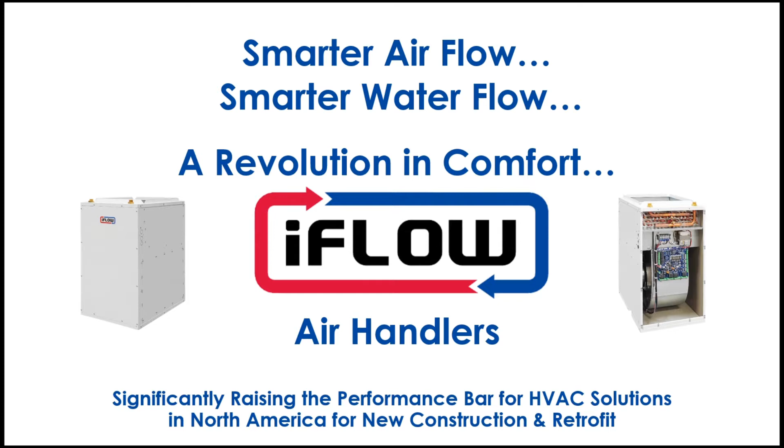In this segment, I'd like to introduce the air handler components and many of the features and benefits. By combining our team's collective engineering, hydronic, and HVAC experiences, iFLOW has created solutions for many of the HVAC industry's most pressing challenges.

The iFLOW air handler represents a technology disruption in that for the first time, our combi systems have been tested and proven to outperform even the best furnaces on the market, making HVAC solutions for homeowners smarter, quieter, more comfortable, and much more efficient, while for the contractors, making the installations quicker, easier, and simpler, and for the builders and architects, making the mechanic room smaller and tighter. So the iFLOW isn't just an air handler, it's the brain and heartbeat of your home comfort system.

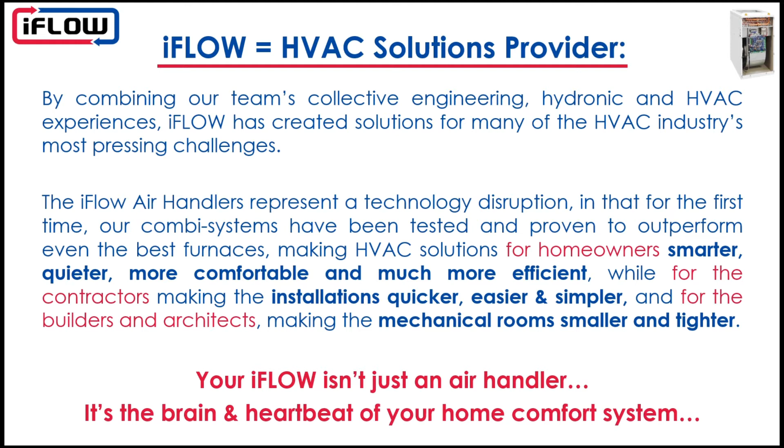So I'd like to introduce some of the components that make up the air handler. First and foremost is the hydronic coil. It's a uniquely designed high-density hydronic coil that earns unparalleled efficiency with tankless boilers, heat pumps, and even tanks. We earned the highest CSA performance rating of any air handler in North America, scoring 98% with Navien and 94% with Rinnai.

Easily up to 15 to 20% better than even the best AFUE furnaces in the market due to better low BTU performance, and that would be below 23,000 BTUs, which is the minimum modulation rate for most of the new furnaces.

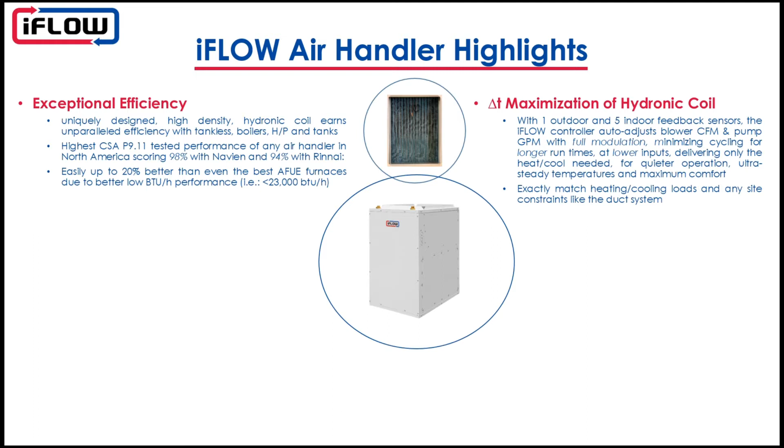Part and parcel of that efficiency is maximizing the temperature differential, or delta T, across the hydronic coil. So we have one outdoor sensor and then we have 5 indoor feedback sensors, all feeding back to the controller information to allow it to auto adjust the blower CFM rate and the pump GPM rate with full modulation, and that's full modulation from 0 to 100%, so that we can minimize the cycling, offering longer run times at lower inputs, delivering only the heating and cooling needed for quieter operation, steady temperatures, and maximum comfort.

We use a variable speed ECM blower with constant CFM, so it's a 1/2 horsepower Genteq EON variable speed ECM motor with full modulation, and from 0 to 100% we can modulate that blower in 1% increments. So we can set it for 5%, 95%, 37%, or 62%. So within that range from 0 to 100%, we can deliver exactly the CFM that you need. And we can deliver that for the cooling side, and then separate input for the heating side, and then separate input for even the circulation side.

This blower operates at a constant CFM, so it will automatically increase power to the blower to maintain CFM in the case of increasing static pressure. With that blower, we can overcome resistance in the ducting so that you can use perhaps smaller ducting on your system, which would typically cause higher buildup of static pressure, but again, we can overcome those static pressures up to 1.5-inch water column.

The software and the hardware for our unit is designed in-house. It offers unparalleled intelligence as the unit can auto-adapt to maximize the efficiency and the comfort for the homeowner. There are over 100 fully programmable parameters, but then we also make it very simple and easy for the contractor in that we have an auto default for each and every one of them. So if you don't want to set any of the settings, it will automatically run without problem, with no adjustment required.

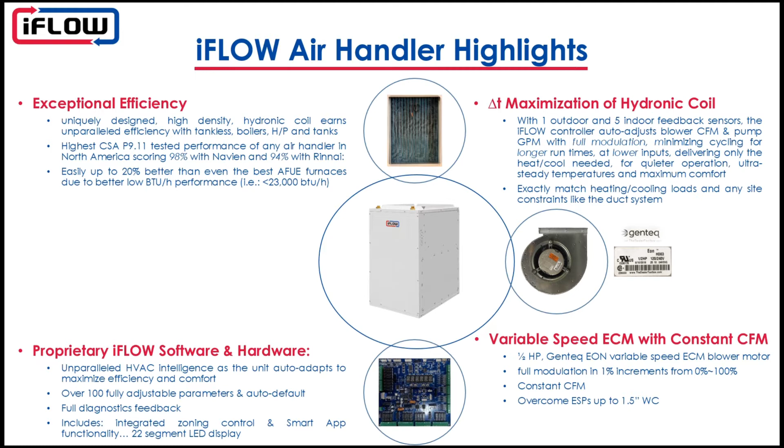If you do, however, want to fine-tune or precisely tailor the cooling CFM or heat delivery to any part of the home, for example, you can do that through the controller. You get full diagnostics feedback through the 22 segment LED on the display or through a smart app,

which is our next feature. So we've developed a smartphone app for our unit. It basically transforms your phone into a smart thermostat, offering you complete control to adjust any of the parameters in the unit that you want, and then you're able to monitor and control it from home or remotely as you need. So really, there's no need to buy an expensive thermostat; with the iFLOW it's built in.

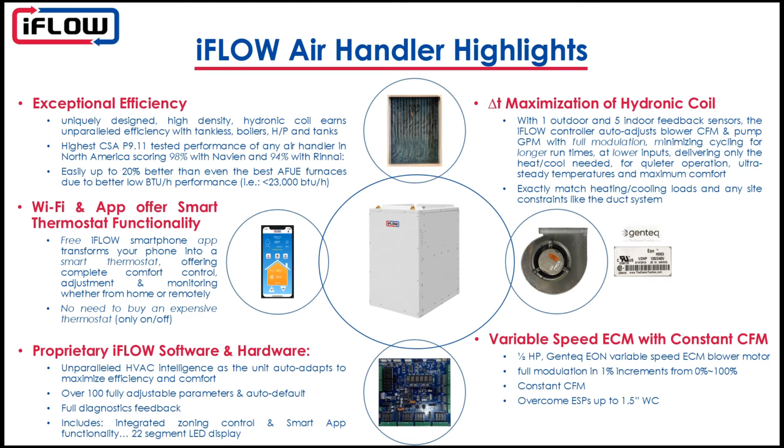Another feature that's built into the hardware of our unit is precision zone control. It's built onto our unit, so there are no extra components to buy. We have the capability of running a 2, 3, or 4 zone system. That zoning capability will eliminate any stratification, any remote area problems with heating and cooling, any remote rooms above the garage, for example. We'll be able to fix all of those issues with our zoning system.

All of the thermostat and damper wires are all wired back to the board, or all connected to the board. So again, there are no other components needed. Our system works with any 3-wire dampers. And again, you have full zone control in 1% increments from 0 to 100%.

So leveraging off the previous example where we have full control from 0 to 100% on the entire system, if you have a zoning system using our board, we will give you full control not only of the whole system, but the ability to control each zone from 0 to 100%. So now we can really fine-tune and precisely deliver the heating and cooling that you need, where you need it, when you need it, and whatever amount you need it.

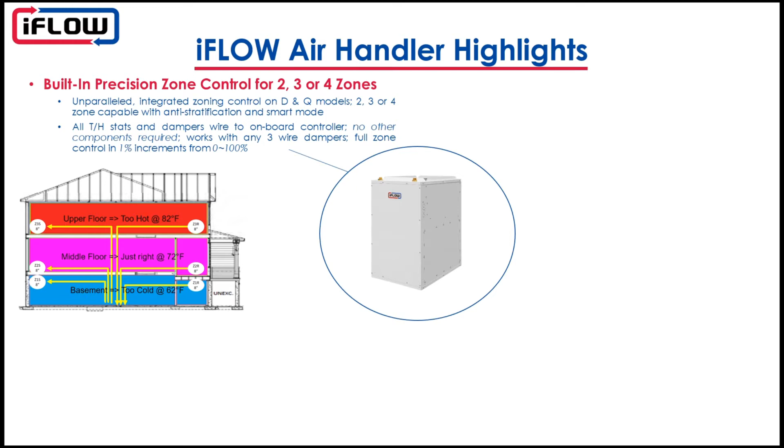So in terms of installation, we give you lots of flexibility. With the unit, we can return on the left, the right, or the bottom. We can go upflow, downflow, horizontal above, horizontal below, or we can even hang the unit from the ceiling using joist hangers. In terms of the mechanical rooms, we can install in from an 8.5 square foot closet, so under a 3x3, right up to a 3x4 or a 6x2. So those are the different configurations, but we give you lots of flexibility with regards to installation of the unit.

And then finally, we can work with any heat source. We can work with any tankless water heater, condensing or non-condensing, depending on where you are in the country. We can work with any boiler, or any combi boiler for that matter. We can work with tank type water heaters or heat pump water heaters, and we can even work with heat pumps, as you see by the top.

With the heat pumps at the top, we actually have our own switching function for hybrid systems, and you can actually even control the operation based on the peak and off-peak rates. So we actually give you that flexibility to time the operation so that you can switch from your heat pump, for example, to your gas when the electricity is in peak rates, and vice versa. Go back to the heat pump when the electricity is in lowest rates, and then turn off your boiler. So we have the ability all built in to control that functionality.

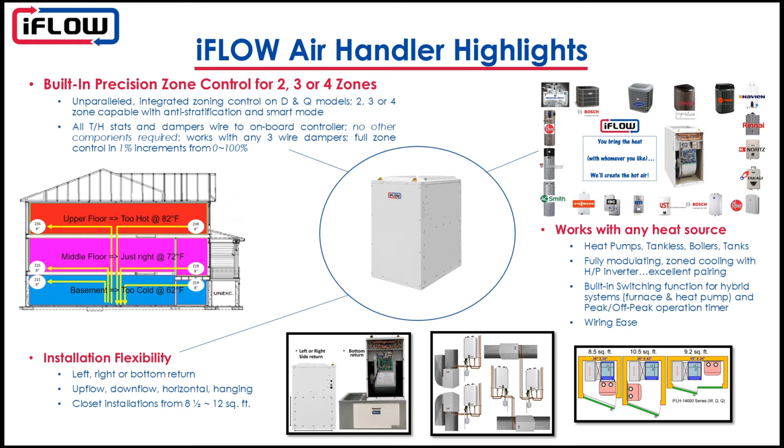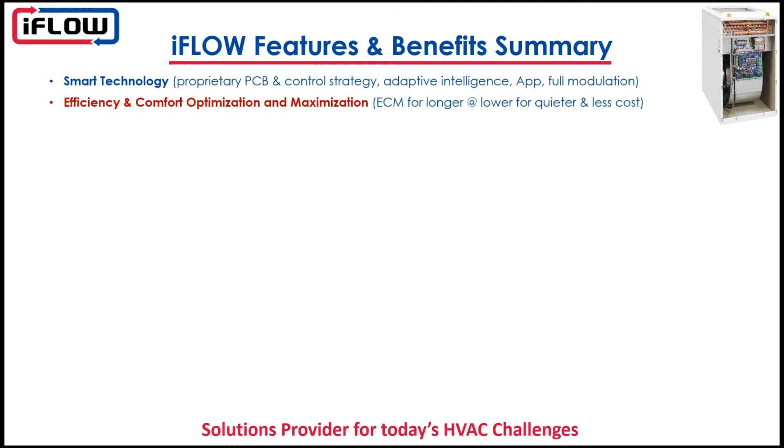So just a summary of some of the benefits. So you have all of that smart technology. So the proprietary PCB and the control strategy, the auto adaptive intelligence that will maximize the efficiency of your system. You have the smartphone app, and you have the full modulation using the ECM blower and our pump control. Using that ECM, we're going to get longer run times for quieter and less costly operations. So again, we're maximizing the efficiency.

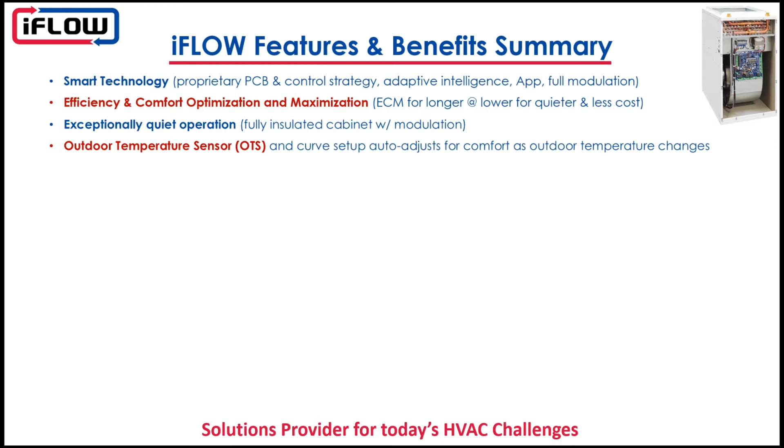Exceptionally quiet. So because of that ECM, and because we're modulating to whatever BTUs you need. If you need 5,000 BTUs, we modulate down to 5,000 BTUs. So the unit is ultra quiet, and the cabinet is fully insulated as well, to give you even quieter operation. We have the outdoor sensor, so that curve sets up so that as the outdoor temperature is dropping, we will increase the comfort delivery, the temperature delivery into the home. As the temperature outside warms up, then we will adjust the heating down. So this is all done automatically through our outdoor sensor.

We have, as I mentioned, the full zoning hardware and software built in so you don't need any other components. We will do it all in-house, all on the board of the unit. We can deliver that heating and cooling when and wherever you need. We can operate at that higher static pressure up to 1.5 inches, allowing you to use smaller ducting or any type of high static pressure application.

We offer quicker and less costly installation in that if you compare it to installing a tank or a tankless or a boiler and then a furnace, with each of those options you would have 2 gas lines, 2 exhaust lines. With our system, when you pair with a water heater or a boiler, there is no gas line, there is no external venting. We have the EZZE Plumbing kit to make the installations very quick and easy, and there are no additional controllers to set up, so it's a quick and easy installation.

We have better looking installations in our opinion, in that you have one less exhaust vent, that's one less wall penetration, one less potential leak path, and it looks better on the exterior wall.

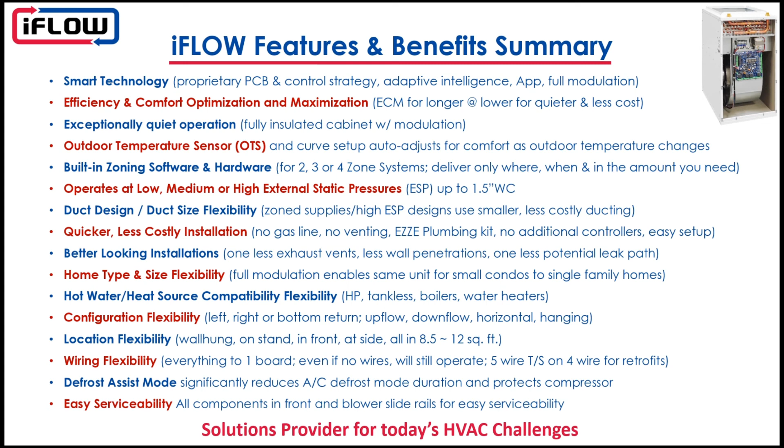We have a defrost assist mode, in that when your AC unit goes into defrost mode, we can actually supply heat to the hydronic coil, which will significantly speed up the defrost mode and basically cuts it by 2/3 the time required. And then lastly, it's very easy to service. All of the components are in the front of the unit, and the blower slides out on a slide rail for easy serviceability and management. So those are really a summary of the features and benefits.

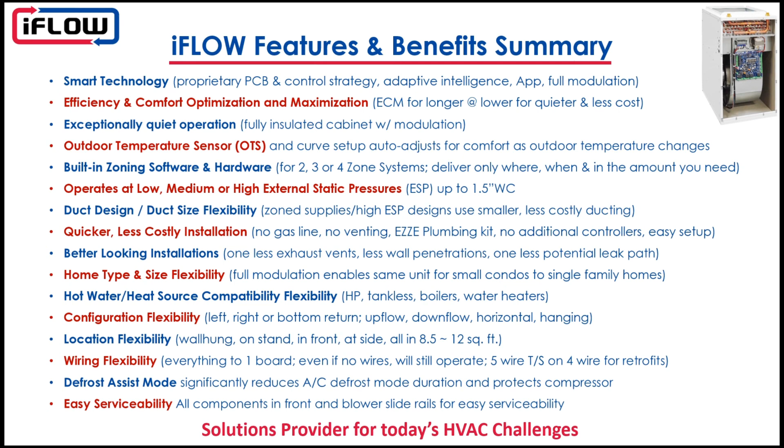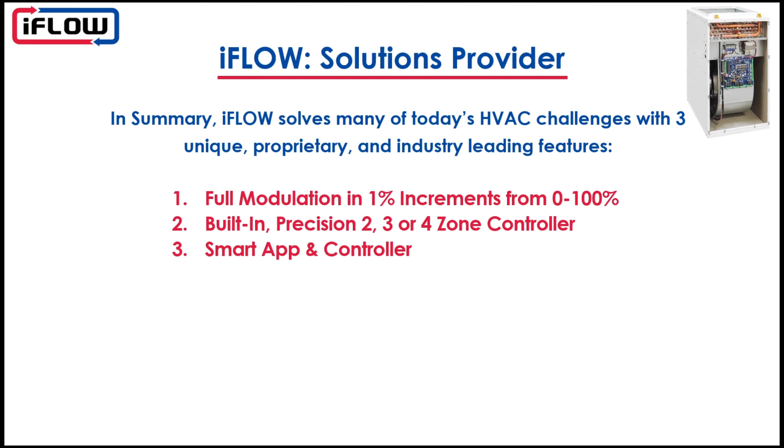To sum it up with 3 simple points, we have 3 unique features that allow us to get the performance. One is full modulation in 1% increments from 0 to 100%. We have the built-in 2, 3, or 4 zone controller, and then we have the smart app and controller to make the system communicate effectively with the homeowner and to give you full control. So really, iFLOW provides superior functionality and performance, providing real solutions for the HVAC industry, and really is the future of HVAC. Please try it. We're sure you're going to like it.